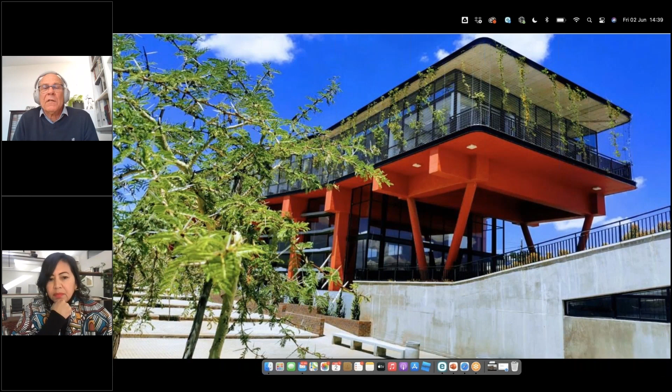Just take a look at the accolades and you will see that Nadia has received multiple awards for her work locally and internationally. Her work has been exhibited at the 16th International Architecture Exhibition, the Venice Biennale. Her sculpture Refuge was displayed in the garden of the Palazzo Mora in Venice, Italy. Nadia is internationally acclaimed, acknowledged for her lifetime of achievements and for her work and deep sense of social commitment.

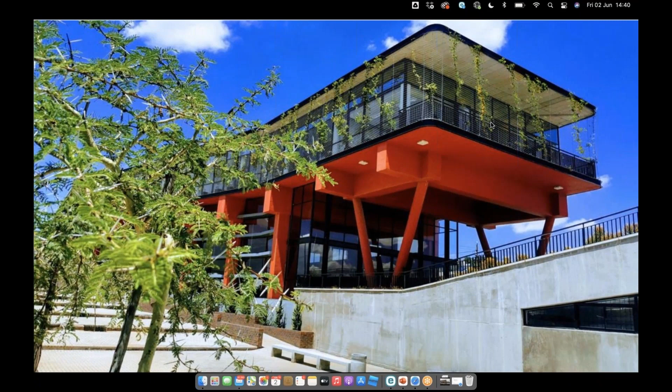So today I will be talking about spatial justice and what that means to me in terms of how I practice and the work that we produce. Jeanne Gang talks about the architect as a relationship builder. For me, I believe this to be true. The architect can become the instrument for creating change and strengthening connections between new and existing social structures to pull towards a more cohesive social and urban fabric.

When looking into theories around human-centered design, the IDEO Field Guide to Human-Centered Design states that embracing human-centered design means believing that all problems, even the seemingly intractable ones like poverty, gender equality, and clean water, are solvable. Moreover, it means believing that people who face those problems every day are the ones who hold the key to their answer. Human-centered design offers problem solvers of any stripe a chance to design with communities, to deeply understand the people they are looking to serve, to dream up scores of ideas, and to create innovative new solutions rooted in people's actual needs. This approach is core to my design philosophy.

Architects have the power to create physical environments that uplift and challenge social injustices of the past. In the action of engaging with marginalized communities who have seldom had the ability to exercise their own agency in terms of their built environment, it is an opportunity to assist these self-same people to create their own spaces and shape their futures. Architecture must capture the imagination of its users and allow the user to begin to dream of something better, to aspire to more.

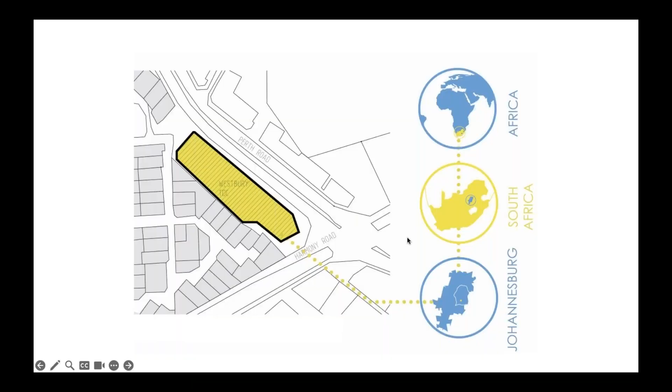Westbury lies to the west of Joburg City. It is a harsh and hard place to live. Known for gang violence, this has become synonymous with the name Westbury. Very little thought or investment was given to the social infrastructure of such neighborhoods in the past.

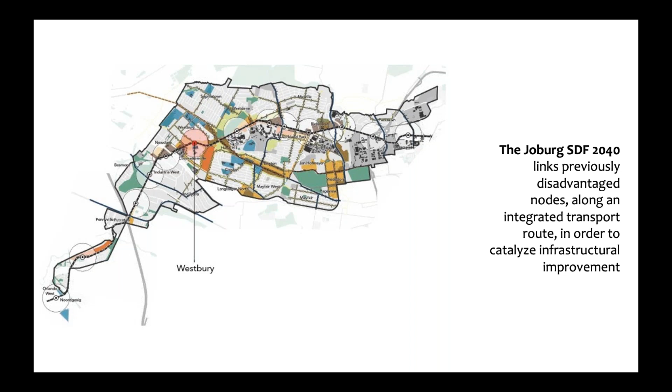The apartheid planning of our previous undemocratic government wrote into law the separation of people, and this was concretized in the spatial planning. Non-white communities were pushed to the outskirts of the cities, leaving the poorest of the poor with no job opportunities where they lived and too far from economic hubs, often without public transport systems in place. The poorest of the population were earning the lowest wages and having to spend the largest part of their wages on traveling costs. The South African cities remain among the most inefficient, unequal urban environments in the world.

The Westbury Transformation Development Center is a mixed-use public building that champions the importance of architecture in changing our urban landscapes in ways that can affect spatial and social justice.

We started to engage with the communities that would be end users in this project. With a complex project brief with multiple end user stakeholders, this meant getting to understand the very specific needs of very different groupings of people. Our engagement process was carried out with the littlest users to the senior citizens and the teenagers. This was an enriching experience for us as designers. In the end, our brief was long and tailored to the needs of each grouping. Our client, the Department of Social Development, embraced the opportunity to have a building fit for purpose.

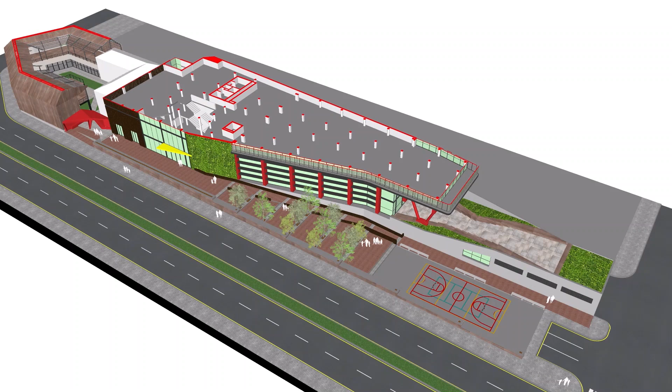The site is a long, narrow sliver of land. It skirts the edge of this marginalized community of Westbury and is located in a very prominent corner of Westbury itself. It becomes the gateway to the community. And this community is separated by major arterial routes. The building envelope, restricted by the limited buildable area, holds the corner and then steps to sit far back off the Main Street edge.

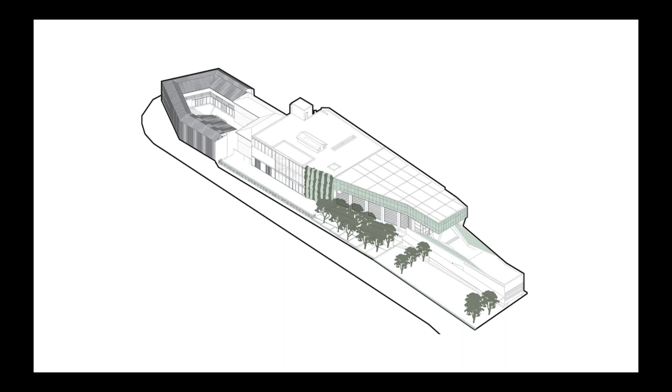This carves out a generous public space, a linear park in front of the building, to be used by the community for various social, sporting, cultural, and everyday activities. The public space is invaluable in this community, where space was never before afforded. It is as important, if not more, than the building itself, and becomes the catalyst for change. Conceptually, the design seeks to create smaller safe spaces within a larger program and to create a generous public space along the front of the building.

The existing school building, St. Barnabas School, was built in 1935 and carries a significance to the community's collective memory of the space. The building becomes the anchoring point to the site around which the design hinges, repurposed as the preschool classrooms for the ECD.

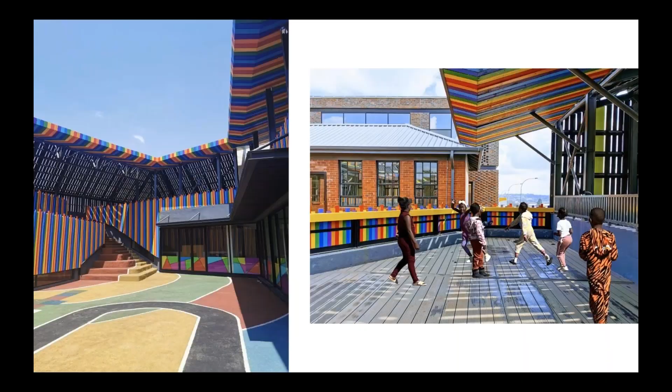The stoic charred timber cladding wraps a defensive courtyard against the busy corner of Perth Road and Harmony Road. This defensive skin is unassuming and turns its back on the street. But once you step inside, the ECD courtyard is filled with a burst of color and is focused on the experience of the child.

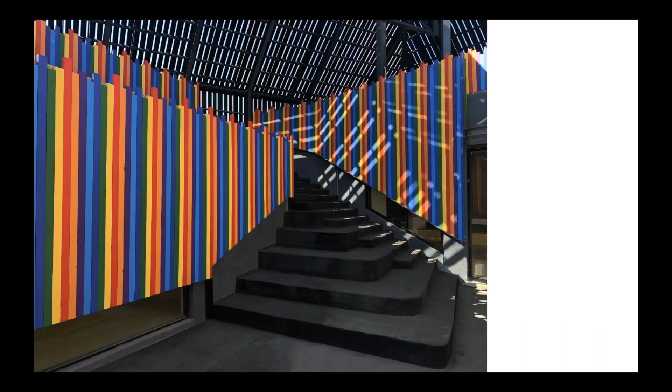The long built form is orientated along the east-west axis of the site. This allows long, narrow floor plates to get the maximum natural daylight deep into each floor, with natural cross ventilation easily achieved. The western and eastern facades are intentionally short with minimal sun shading required. All services are located along the southern facade.

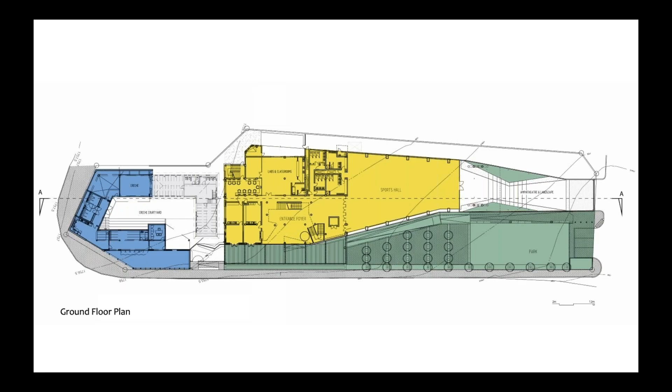Passive heating and cooling is an integral element to the design. An integrated green approach has been taken towards the shading of the building. The northern facade has deep horizontal fins with a large concrete overhang on the first and second floors.

Being in a summer rainfall region, the north-facing living screen is in full bloom during summer months, creating cool, comfortable spaces during these months. In winter, the plants lose their leaves, letting in the warm winter sun. Changing color and texture of the creepers differentiates the internal program beyond, changing as the seasons change.

The planted wall formed part of the community engagement program, where families were offered the opportunity to grow a 1 meter squared pallet of indigenous succulents, which were then transplanted onto the building to form its 9 meter tall green wall. A greenhouse on the second floor becomes a focal point for the food security program run by the state.

Here, the critical skill of growing your own food is taught as one way to address food scarcity and work towards self-sustainability.

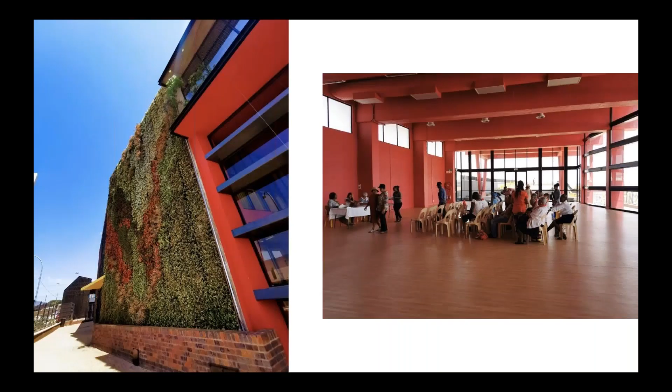The double volume structure of the amphitheater houses a multi-purpose center and sports hall, which opens up onto the amphitheater and planted garden on the roof. This space becomes a stage upon itself, where the surrounding community has visual connection to activities happening on the amphitheater and inside the sports hall. This constant visual connection between activities inside the building and life happening outside creates a joyful tension and ever-changing curiosity between the building and its users.

The sustainability of public buildings goes beyond architectural interventions of scale and comfort. Equally important to us is the inclusion of the communities for which these buildings are designed, giving agency and aspirations to such communities. This can only be achieved through collaborative and inclusionary practices.

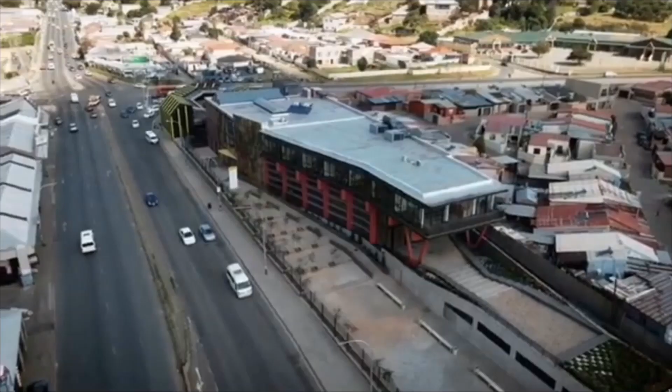Located at the gateway to Westbury, this project offers a unique opportunity to shift perceptions. It begins to change the urban landscape and offers the prospect for outsiders to start seeing a community in all its diversity. Where land was taken from so many people before, this project gives back. It gives back a public building that works, a space which is equitable and can be used by all.

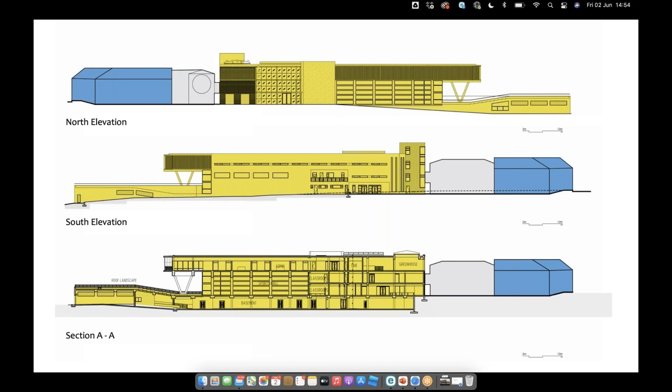Though this project has won awards locally and internationally, I feel it's somewhat academic because currently the project is not fully occupied. And as architects, we can only really judge the success of a project once it is in full use and how users respond to those buildings.

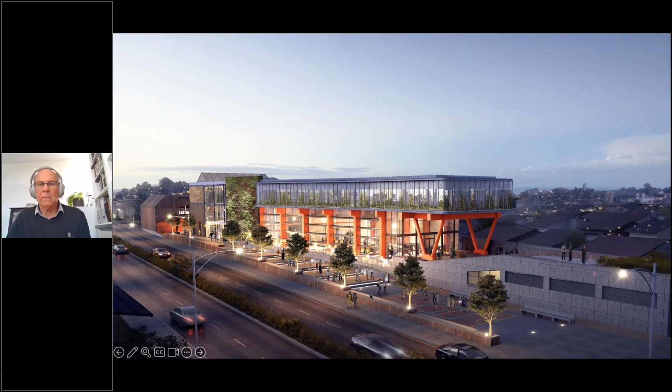Marginalized communities are often poorly serviced and have very few public amenities. The public facilities which one can find are often behind a fence, very clearly enforcing exclusion. If we were to achieve anything with this project, the Westbury Clinic, it would be to challenge this norm.

So when we started this project, we asked ourselves a few simple questions. The first being: can design mitigate and reduce the spread of airborne diseases? TB is still one of the number one causes of death in South Africa and in Africa. The second question we posed was: how can design change the way we think about public facilities in South Africa?

Where the fear of violent crime usually forces us to put everything behind a fence, how do we start to change the way clients, in this case city departments, think about this? And how can we start informing the public's perception of public buildings?

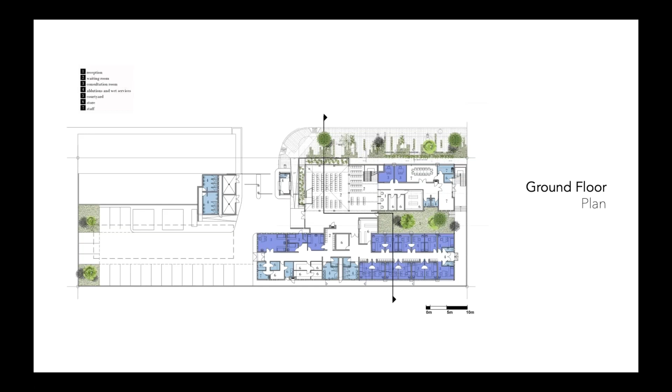The double-story street facade is designed with high-level openings so that the space is always looked over. It creates a backdrop for life unfolding while creating a safe, surveilled space.

The landscape softens the edges, providing shade. Public engagement was facilitated through the project from initial design stages through construction. The construction method was also about building relationships and the opportunity to start rebuilding trust in the community.

The English bond face brick is reminiscent of the traditional face brick buildings of Joburg CBD, and its aesthetic speaks to its surrounds while simultaneously differentiating itself through its height and monolithic aesthetic. As a result, it provides a relatable landmark.

This is a low-tech method of construction and easy to do. Local laborers were trained, and this building was constructed predominantly using local labor. This creation of jobs started building confidence in the local community, demonstrating that the local government was paying attention to the plight of unemployment.

Our participatory approach to this design allowed us to harness local skills and incorporate those skills in very visible ways into the design. The steel screens were made by local artisans and was our design solution to the client's request that we put burglar bars on all windows. We had very low wastage, and the cutouts of the steel screens were incorporated into other parts of the building. All materials were locally sourced.

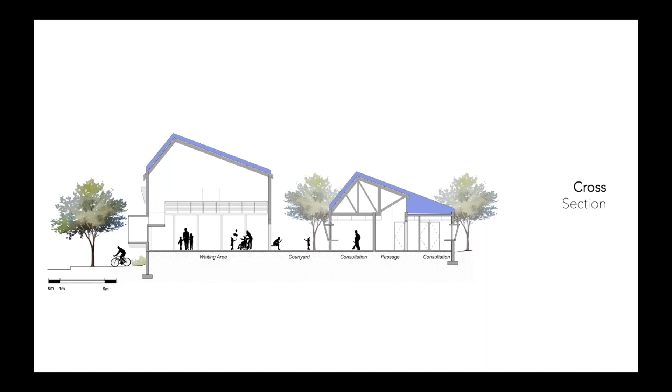So we hope that in this project, creating a paradigm shift with the client in terms of how they look at public projects, this would start changing the local community's perception of their worth, and open the ideas for them that they actually do deserve better public amenities, and it could be done.

And in the end, we feel that this is a very successful project. We've created a building and an environment that heals, one that promotes health and human dignity, and really done through very simple design solutions. Thank you.